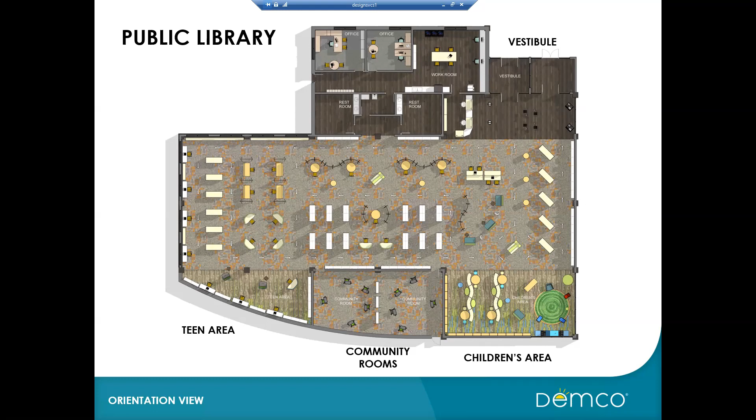This is the first area, the entrance area at the top right-hand corner of the public library we were just looking at, now in a 3-dimensional view. What we're trying to illustrate here are some recommendations and best practices around how your entrance areas can be used.

In this view, we're speaking to placing sanitization stations by entrances and exits, so people can clean their hands as they enter the library space and also as they exit.

Additionally, we're recommending that if you have self-check stations, look into technology that's easy to clean, with limited touch points. Anything that reduces touch for patrons as they're checking in and checking out books is a recommendation.

In this view, we also showed sanitization stations directing traffic, or at least dividing between entrances and exits. Using furniture and items to help direct traffic flow and traffic routes is something we've shown throughout all of these renderings.

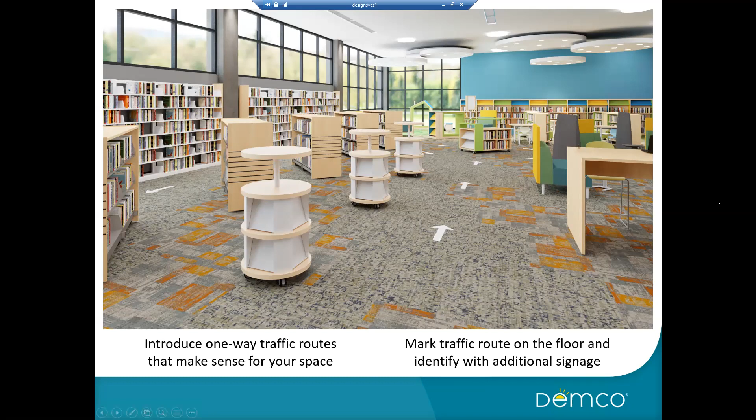With these slides and three-dimensional renderings, we're also building these spaces in virtual reality. Anytime there's an icon on this presentation, we can click the slide and share the same view we were looking at in 2D, now in a 3-dimensional view, which helps orientate yourself to the space we've just been seeing.

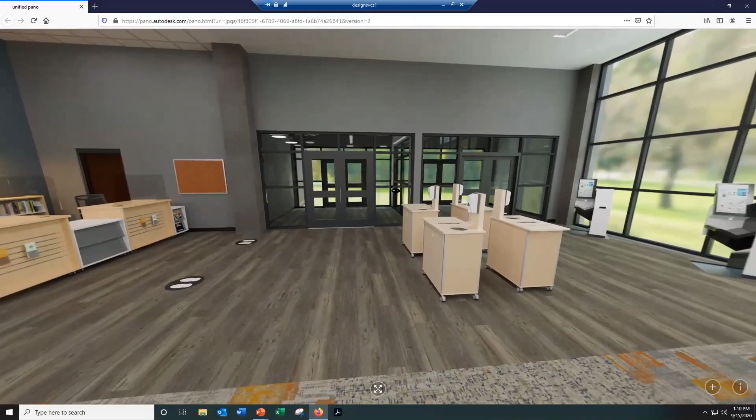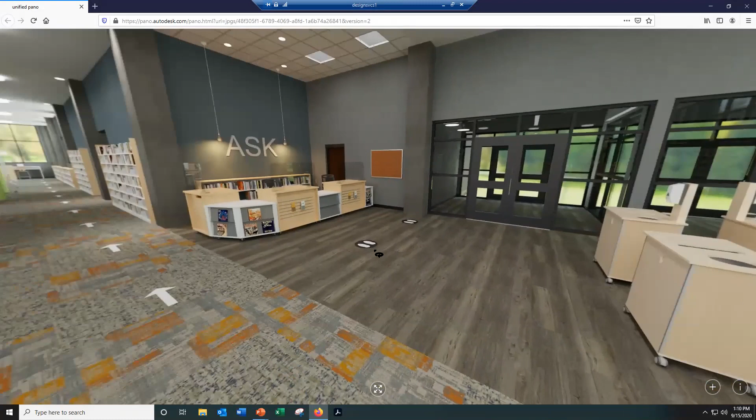So we have the vestibule area here, the sanitization stations, self-check units with limited touch points, and the circulation desk with the distancing markers. Then as you walk into the library, these tables here show the recommendation to pull out 2 chairs on either side to promote distancing.

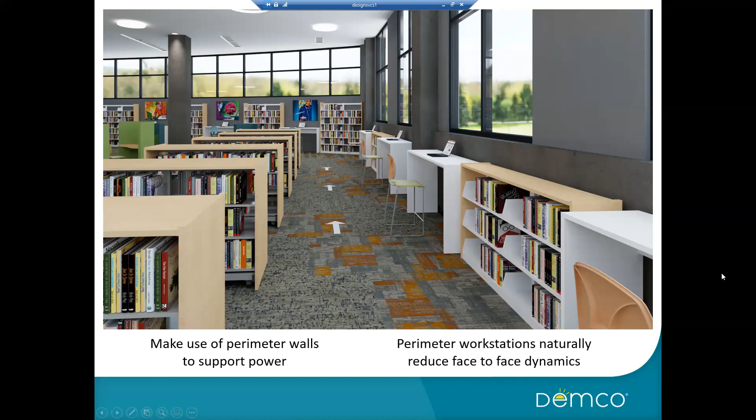And using existing shelving. Any existing shelving that you have in your library space can act as a great way, a natural screening device, essentially, making use of the shelving that you have to build out these spaces within spaces. And if you're able to complement that shelving with additional mobile screening, you can create some very defined work areas that have this screening to help support that distancing.

Again, this is a three-dimensional view. We can click that and see how we've got this high-level shelving here, but we have this space within a space between these high-level stacks, and we're further building that out, both with this mobile screening and with these mobile desk elements that have an integrated work surface.

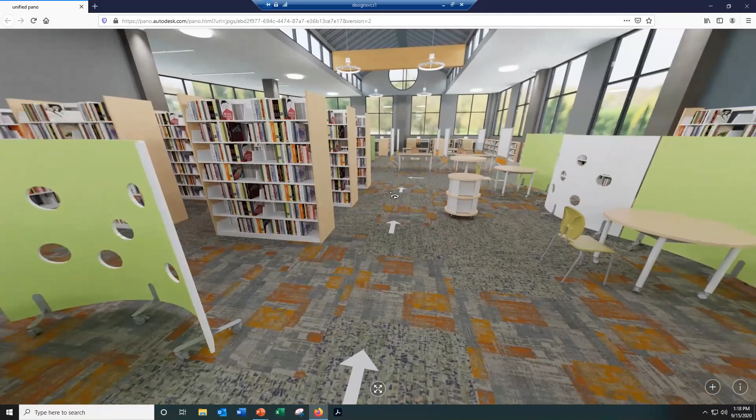To give you an idea of where we are in this library area, this is the main walkway into the space that we were looking at earlier. Then we have these mobile screening pieces. And this is back into the main lobby area.

If you do have high-level shelving that isn't mobile, by its nature, high-level shelving doesn't have that mobility, consider removing a 36-inch wide section of shelving if possible. The rationale is that sometimes these high-level sections in your library can have quite long aisles, which can be a challenge in terms of creating effective traffic routes. By removing a section and indicating a one-way traffic system, it allows a more natural, more fluid traffic flow.

Especially if there's a patron browsing a book down this one long aisle, it might limit flow down that route, but by having this additional in and out point, it gives patrons more options and allows more of a natural flow if you have any high-level stacks.

But low-level shelving can be made mobile by its nature, and the mobile shelving can be flexed around your space and positioned in a way to help further delineate where your one-way traffic routes are. So we have the mobile shelving here, positioned at an angle that defines and promotes this one-way exit route.

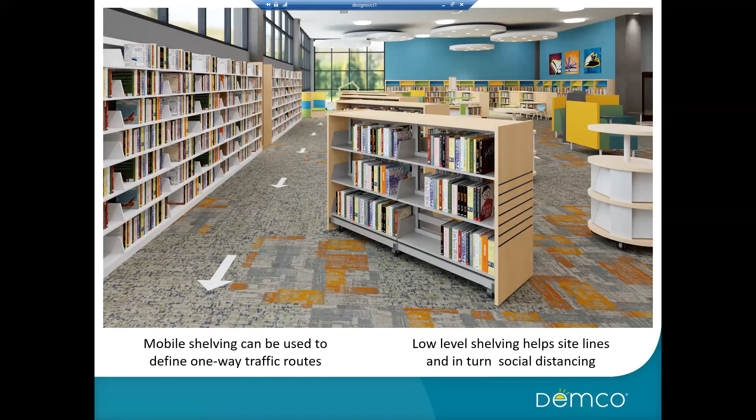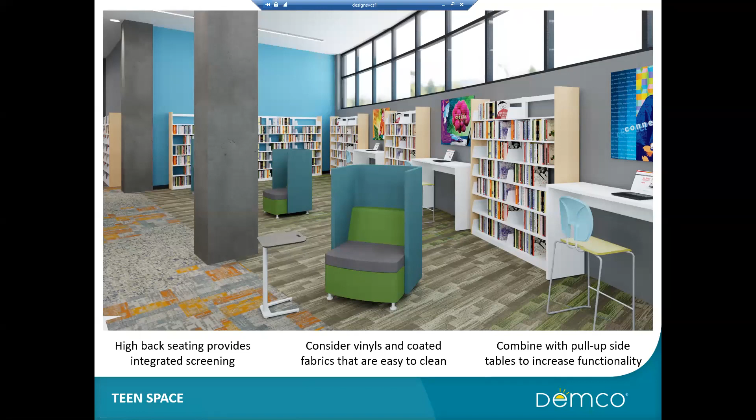Again, on the theme of products or solutions with integrated screening, mobile desking that has fixed screening and can be on casters is a great functional solution you can integrate into your space, or maybe achieve using pieces you already have. Having that high-back seating, high-back desking, high-back lounge can create characterful and unique spaces that can work well for a teen space.

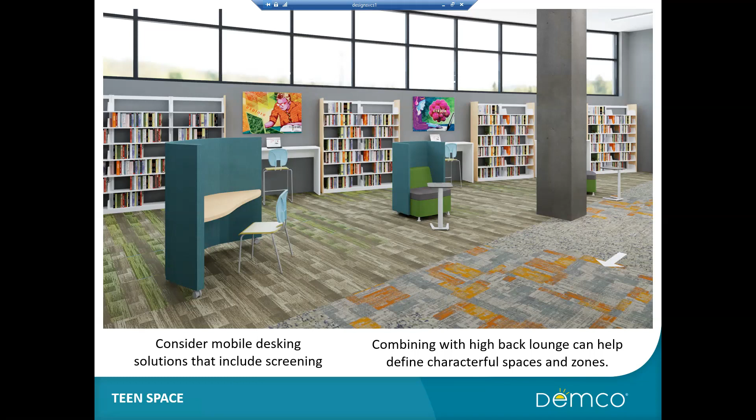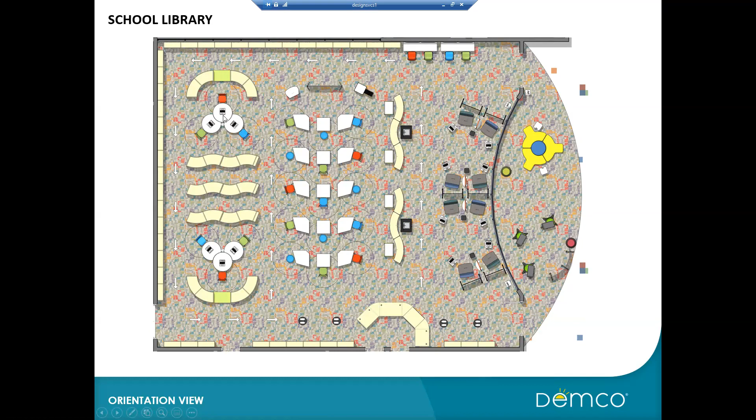We have an entrance and exit area here, and an additional entrance and exit here. This is a circulation desk. Outside the school library space, we have a breakout area, then a lounge, and then we're showing a classroom library space, and library shelving with a couple of breakout zones at the back. So that's the 2D orientation view.

And then we're into 3D, into the library space. By sharing this view, we're making some recommendations. One is to locate hand washing facilities close to the library entrance.

Here we have a mobile sink solution that we're building in, close to the library entrance as you enter. We're integrating it into this low-level wave shelving—mobile sinks and/or sanitization stations, units that are easy to move. This mobile sink is mobile, so it's an item you're able to flex around your space, move around, and locate in a place that works for the architecture of your library, your entrances, exits, and any teaching areas you might have.

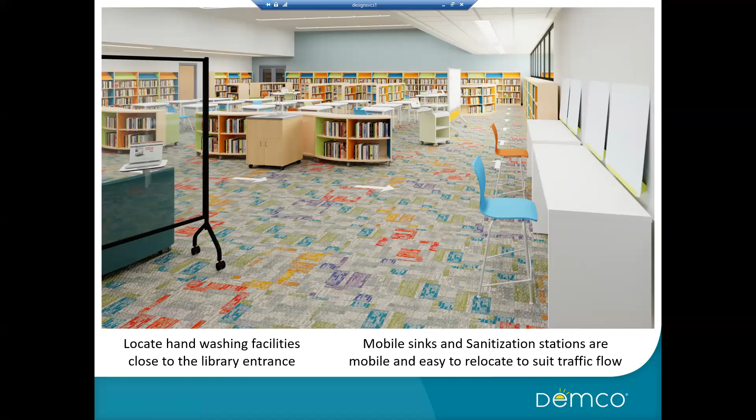Again, in this view, this is the circulation desk. We're recommending employing those 6-foot distancing markers. Depending on the architecture of your room, that can sometimes be a challenge—circulation desks are sometimes difficult to relocate—but just make best use of your area and see if you can build out these 6-foot distancing markers.

Again, adding acrylic screens to the service points. We're showing the acrylic screen that has a small access point at the top to provide a way to pass across books or other information.

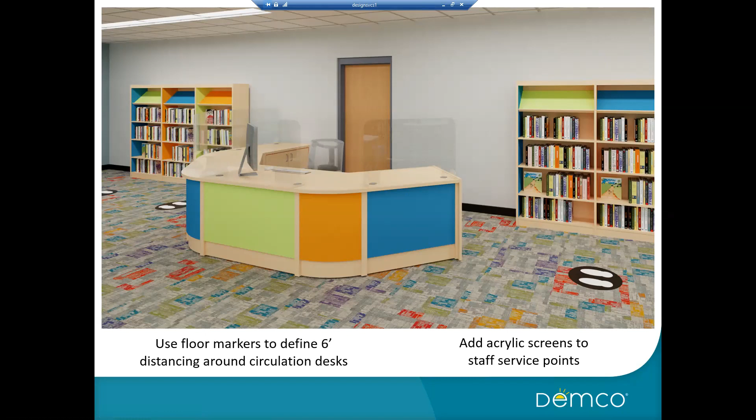Using low-level mobile shelving to help define a class zone. Here we have low-level mobile shelving, and we're using that as a way to build out this class area. School library spaces are a larger space, larger than a classroom, so it's a way to possibly introduce a classroom area into your library, while still having that classroom layout designed to support distancing with 6-foot distancing offsets, which is a CDC recommendation.

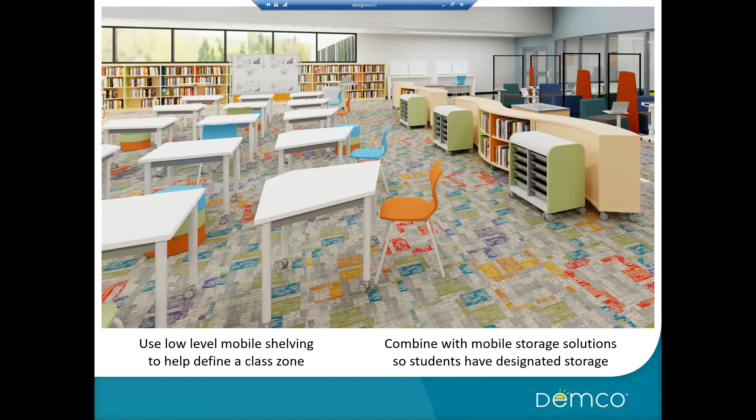If you are building a classroom area into your library, we also recommend trying to integrate mobile storage solutions tailored so each student has their own tote or storage. That's a CDC recommendation related to limiting the sharing of objects—not sharing objects reduces the touch challenge and also reduces the need to clean objects during the day. Giving each student their own tote just helps manage that.

Rearranging desking to achieve 6-foot distancing is easier in library spaces because they're larger. Another recommendation is to have students facing the same way, especially if you're not integrating screening onto the desks themselves, and to use mobile, flexible table solutions. Here we're showing a kite table solution that's mobile, allowing you to reconfigure and reimagine these spaces quickly during the day, designed so they make sense for your distancing model and whatever teaching model you're employing right now.

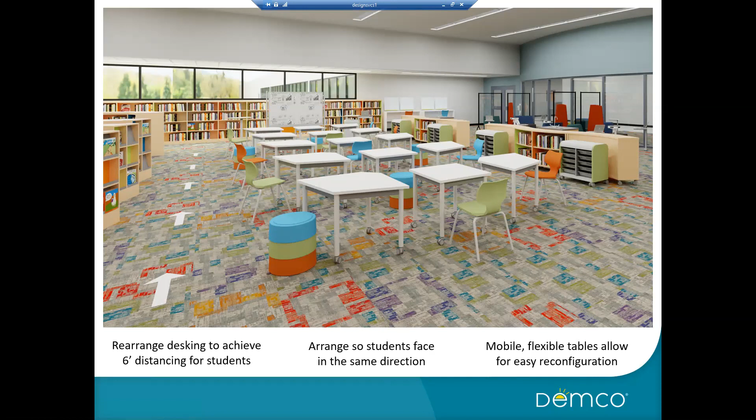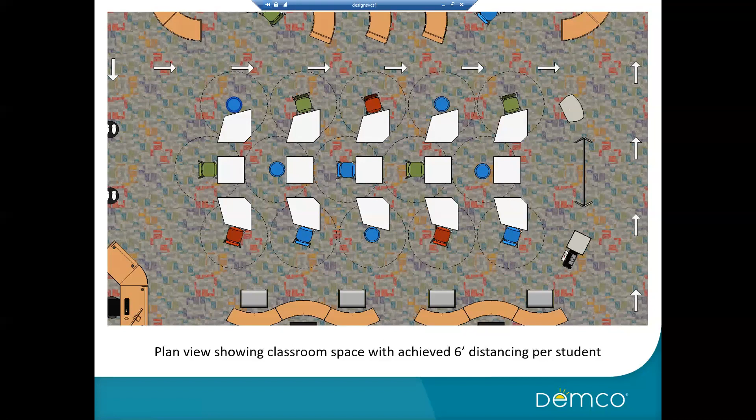The classroom space we just looked at was larger, which allowed for that distancing. But if space is more limited, you can consider adding screens. Screens make it easier to support face-to-face collaboration, which is what we're trying to illustrate with this view of the classroom. Although the space is smaller with more face-to-face collaboration, adding these desktop screens helps reinforce CDC guidelines around having a barrier between students.

We're also recommending integrating dedicated storage. This allows each student to have their own tote, which reduces the sharing of objects. Here we're showing desking solutions actually wrapped around storage, which is another way to design a space and create unique spaces that still meet CDC guidelines.

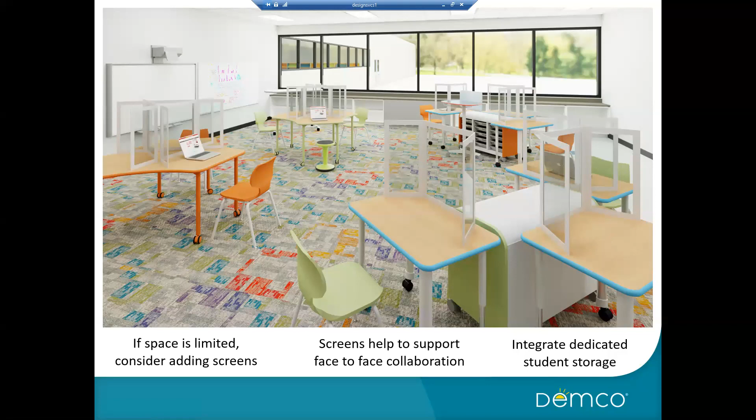This is a view of those barriers again, but here we're illustrating how they can be used in different ways. Although this layout does have 6-foot distancing, we're still employing the screens, and the screens shown here are foldable. Foldable desk barriers are great because each student can have their own barrier and carry it from space to space during the day. Some screens have a frame that can be used to write on, so students can personalize them, adding a nice level of personalization into these COVID-19 designs.

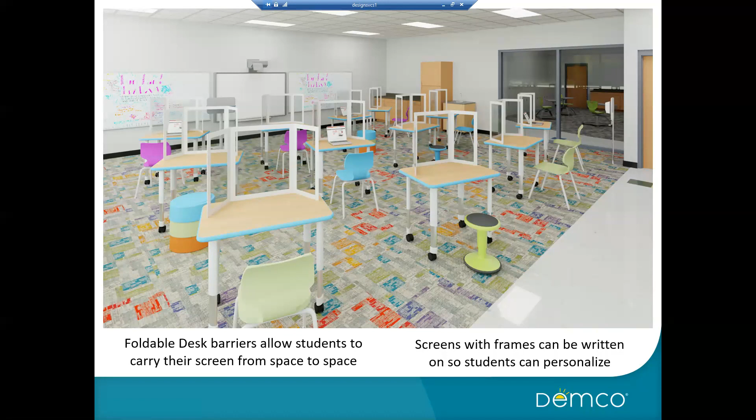As with the public library, shelving organized organically has a natural screening effect. Consider your space and the shelving you have now - if it's mobile, it could be reimagined to create smaller zones, which also helps define traffic routes. Here we have a smaller zone with shelving defining a one-way traffic system, which we're delineating with floor markers.

Depending on your hybrid or cohorting model, some face-to-face collaboration would be achievable with face masks, per current CDC recommendations. So using the furniture solutions you have now, you can reimagine them to support face-to-face collaboration.

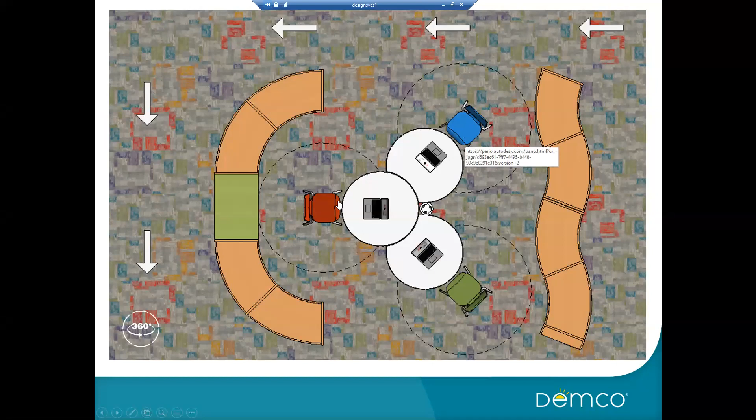This product is called a mini mobile crescent - it's a circle and two crescents that dock together. This flexible product can be reimagined to support 6-foot distancing, and it also has a small area that integrates power. These flexible solutions can be reimagined to achieve these distancing designs. This is a 3D view, and this is a plan view, showing each of these students with a 6-foot distancing perimeter around them.

So as we were designing these layouts, these were the thought processes and design tools that we were using to achieve these distancing guidelines. This is a 360 view as well.

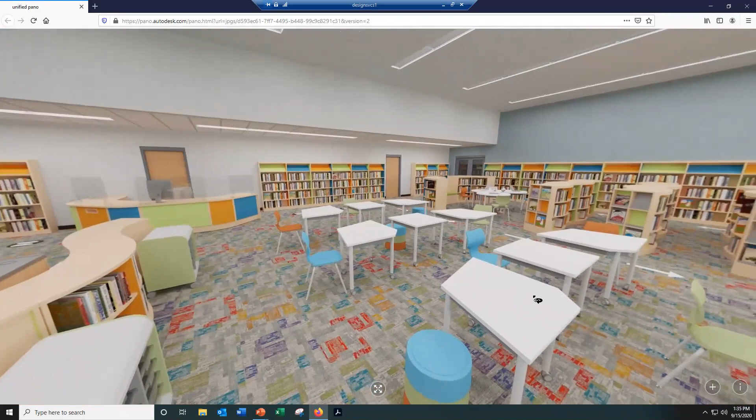So we can click this, and this is the library view as a whole. We have this lounge area across the back with the screening, similar to the public library, with vertical screening. Here we're showing acrylic screening, then fabric screening. We have low-level shelving with the sink and storage, the classroom area with distancing and all students facing the same way. Across the back, we have mobile shelving with smaller breakout zones and 6-foot distancing face-to-face collaborative areas. At the front, the whiteboard treats this area as a teaching area.

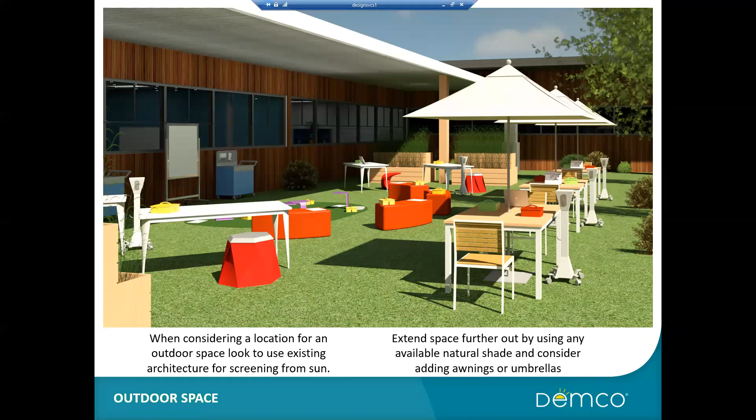And then the final space today - so we had the public library, the school library, and this is an outdoor space. As Kurt said at the start, this is more of a trend we're seeing, how to make use of outdoor spaces. Outdoor spaces are a great benefit in terms of distancing and managing the COVID-19 situation. So how to employ these large open air areas - this is one space that we created.

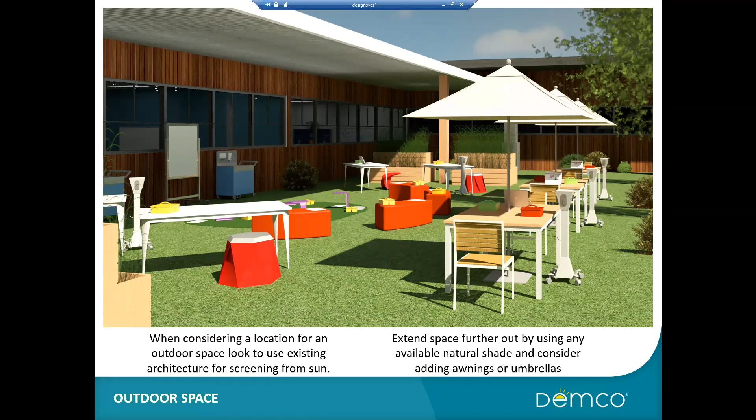When designing this space, one consideration for employing an outdoor space was how can we make use of any existing architecture to provide screening from the sun, especially with outdoor spaces, whether it's an extension of a public library space or an outdoor classroom space. Depending on how long students or patrons would be out there, providing that screening from the sun is a great idea if possible. That's what we're trying to show here with this architectural element, then expanding that screened-out space further using awnings, tents, or screens.

Here we're showing some outdoor umbrellas, so we're building this outdoor space and expanding it out further. Also using any trees, anything that provides natural shadow or daylight protection, can just extend the time students spend in this space.

Sun screening can also help with the use of digital devices, obviously reducing that glare from monitors. Here we're showing that yes, it's an outdoor space, but there are rechargeable power solutions you can employ. There might be power points you can cable off from the wall, but that can be a tripping hazard, so rechargeable power towers can be a great way to bring power into a space during the day, then brought back in at night and recharged overnight.

And again, this is an outdoor space. It is designed for distancing, but we're still building in the mobile sink and sanitization areas, and that's what these two elements are across the back wall.

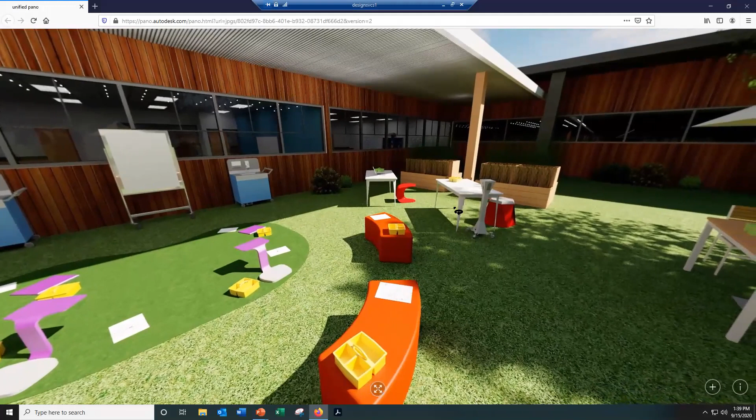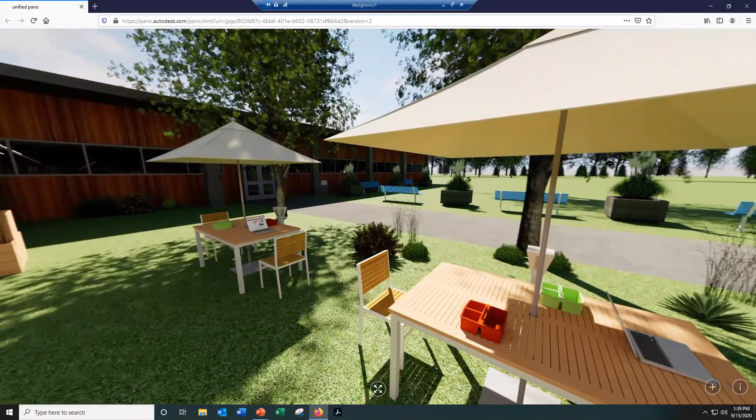This is a 360 view, so we can click this slide, and this is the outdoor space in 3 dimensions. We have the architectural awning, this floor-based learning area with the whiteboard, and then the two mobile sinks. Again, we're showing this tiering with the higher level seating around the perimeter. We have the extended sunshade, and again we're using the trees here - if you have any trees or natural vegetation you can use to help arrange students or patrons under or around, it just helps provide that sunscreen.

So that's the third space we shared today, which is an outdoor learning space. With that, I can stop sharing my screen and hand it back to Kurt. He'll take you through some additional slides for today.

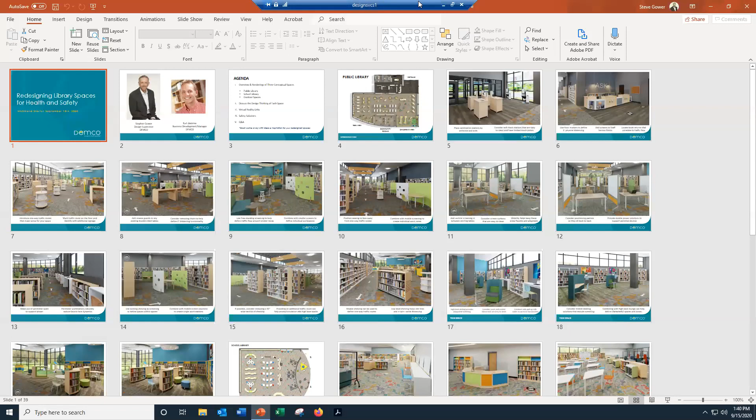Perfect. Thank you, Stephen. Okay.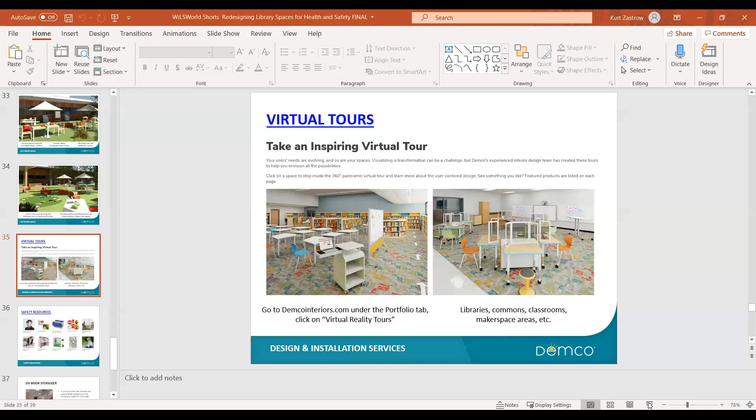Yeah, I hope you guys enjoyed that as much as I did. When I look at some of those recent designs that Stephen's team has done, the color, the shapes, the shadows, it really puts you like you're right there in that space.

One thing I wanted to call out is our roots are in the library world, and that was the focus of today's presentation. Stephen called out a couple of these virtual tours we've created, and there's a number of those on our Demco Interiors landing page. If you go to demcointeriors.com, to our portfolio tab, and click on virtual reality tours, you will see libraries, learning commons, classroom, makerspace areas, group gathering areas, all with both renderings and multiple views where you can take virtual tours of these spaces.

We feel that's where our design team really shines - at some point you're going to need designs, renderings, and visuals to share with your team to spark conversations of what your spaces could look like wherever you are on your journey. If you're thinking about reopening, or you have reopened, we know plans are very fluid these days, but it really takes design to help you envision what can be done safely and what can be done well.

So please check this out when you have time. Again, for those of you who are interested, I can send a PDF of this presentation to you. That's a virtual tour - the hyperlink is active - but if you go under Demco Interiors, there's a number of these that I think may spark conversations from our design team, and we also have installation services that we can help you out with as well.

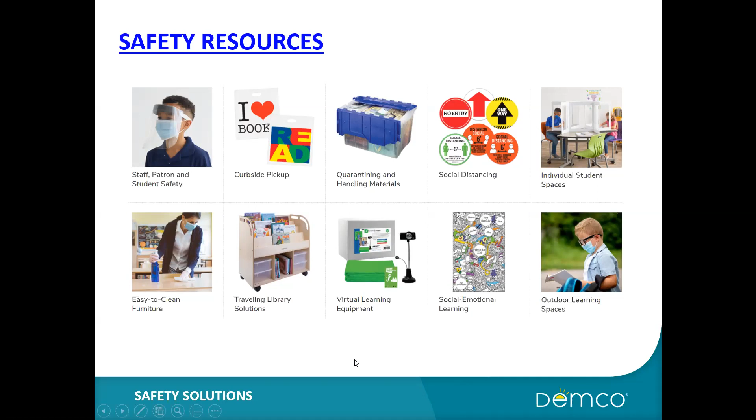And the one thing I did want to call out, especially for this audience of librarians, we've been having a number of conversations regarding a product we recently added. It's a UV book sterilizer, and it can disinfect 3 books in 60 seconds. We view this as having, certainly right now during our pandemic time, active conversations with librarians across the country. I think there's still going to be conversations, especially with what I hear on the news about this being a brutal cold and flu season ahead - can certainly be top of mind.

It's non-toxic, does not damage the materials. For those high circulation books that are constantly being checked out or used for curbside pickup, we view this as a nice solution to disinfect those books. If you're interested in product specs, additional details, or a video, please reach out to me - I'll put my contact info on.